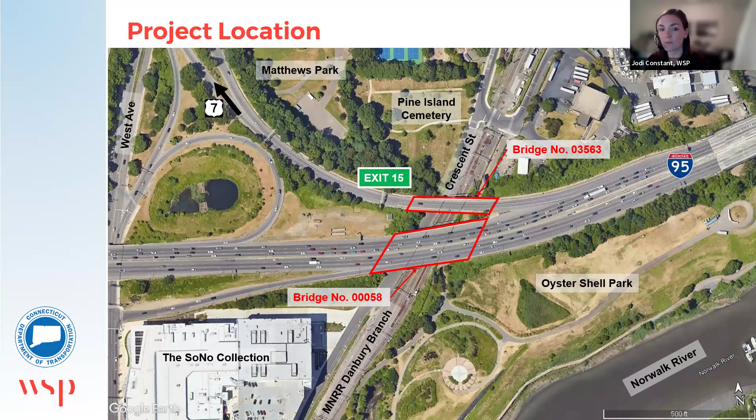The purpose of this project is to maintain a state of good repair for both of these bridges. Structurally, the needs include addressing deck deterioration, bearing, girder, and substructure deterioration. We are going to upgrade each of those structural elements to have a minimum of a satisfactory condition rating. We're also going to improve the aesthetics of this site by removing any graffiti, and in turn, by addressing that deterioration, will also improve the aesthetics.

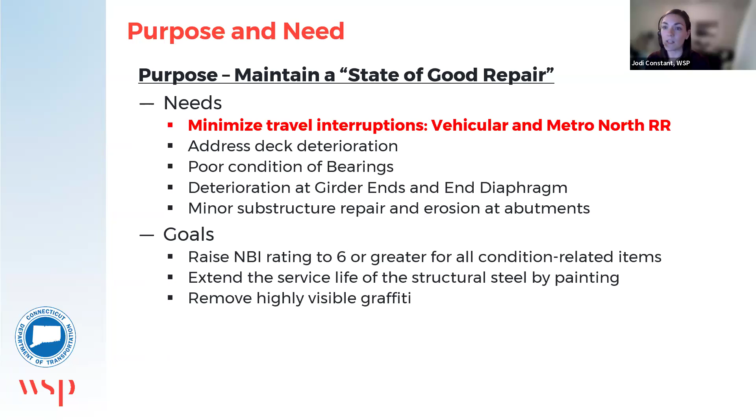Since this is a very heavily traveled area with I-95 being carried, there is an overall goal for the project to minimize any travel interruptions. And that's both vehicular, carried by the bridges, and underneath for Metro North Rail.

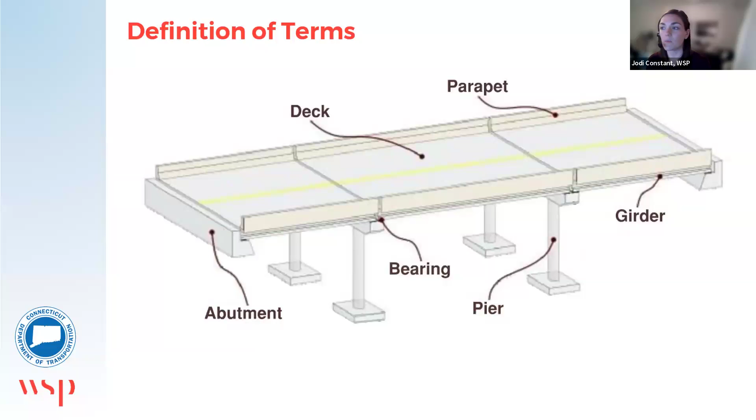Before we review the existing conditions of the bridges, I wanted to go over some terminology that's going to be used in the presentation. Looking at a schematic bridge here, the abutments are the supports on either end of the bridge. The piers are the intermediate supports. The deck is the concrete riding surface, and the deck is supported by steel girders below. The steel girders sit on bearings on both the piers and abutments.

Again, the reasons for this project is to address the structural deterioration of both bridges. There are currently low condition ratings for the deck, girders, and bearings. The photos on the screen here were taken from an inspection that we completed as a part of this preliminary design, which shows the current conditions.

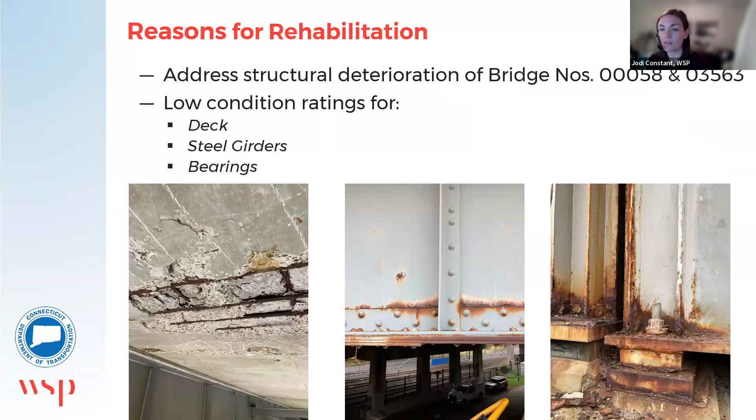When we refer to condition rating, that is a numerical scale that helps us define what the level of deterioration is for each of the bridge elements. So the scale is shown here. As you can see, 9 would be in excellent condition, or otherwise a brand new bridge. Our goal for the project is to upgrade all of the structural elements to have a minimum of a satisfactory condition, or a 6 rating.

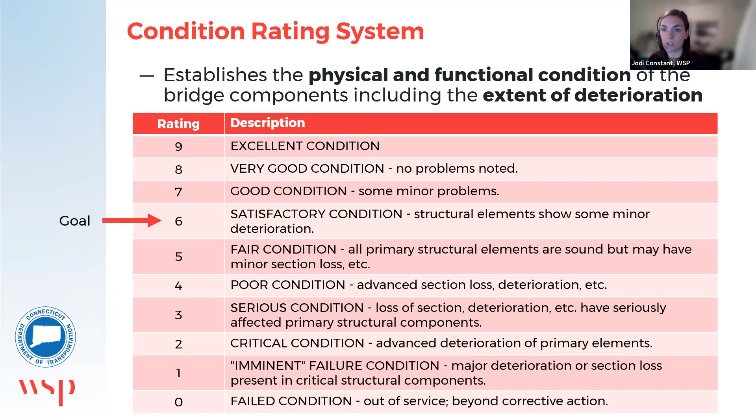This table here shows for each bridge and for each major bridge element, the current ratings. As you can see, there's a number of 5s and even a 4 on the bearings of Bridge 58. Again, all of our project scope is aimed at improving that to a minimum of satisfactory.

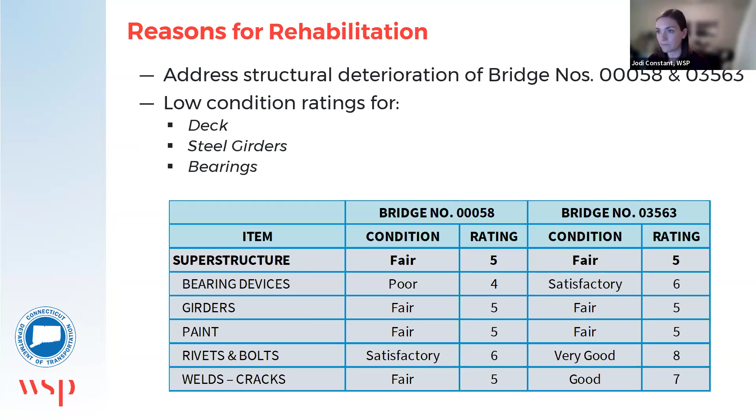This display plan shows the limits of the project scope. The areas shaded in orange are the 2 bridges themselves. This is where a majority of the work is going to be completed for the project. You can also see the shaded yellow areas on either side of the bridge. These are going to be the limits of repaving to really ensure a smooth transition from the existing pavement over the bridges, tying back into existing on the other side.

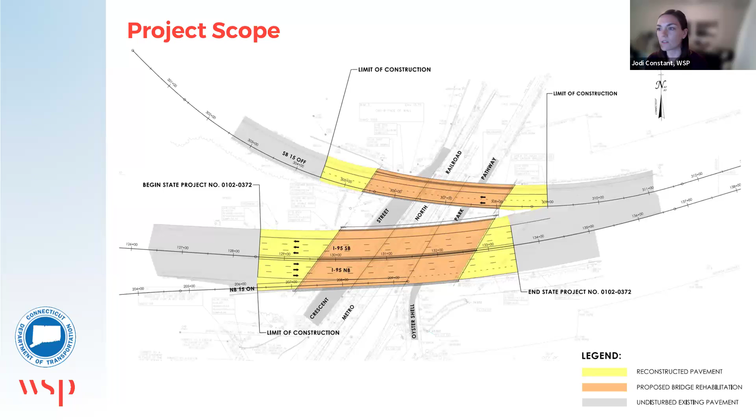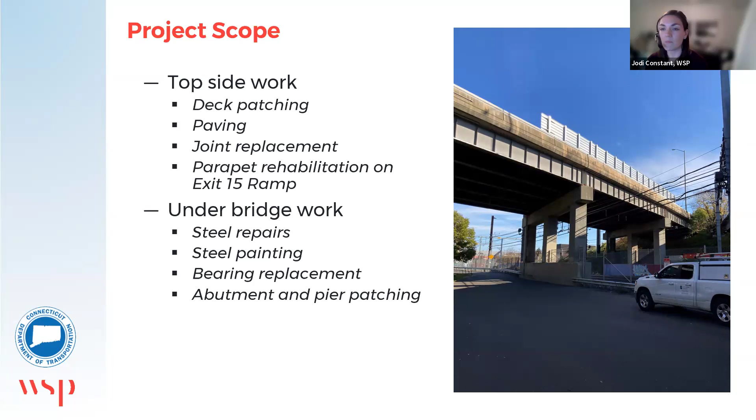For the project scope, on top of the bridges, we're going to be completing deck patching to the concrete deck. We're going to be repaving the bridges. We're going to be replacing joints at each of the piers and abutments. And we're going to be completing some rehabilitation work on one of the parapets on the exit 15 ramp. Underneath the bridge, we'll be completing steel repairs and painting to the existing structural steel. We're going to be completing some bearing replacements at select locations. And finally, we'll be patching the abutments and piers, concrete patching.

Regarding utility impacts for the project, there are overhead utilities that run underneath both bridges. There is a line owned by Frontier that runs along the west side of Crescent Street, only under the ramp structure, and catenary lines along the rail that run underneath both structures. Temporary impacts are anticipated for both utilities. The catenary lines especially will need to be de-energized for any work adjacent to that, and the Frontier line will be temporarily relocated during construction.

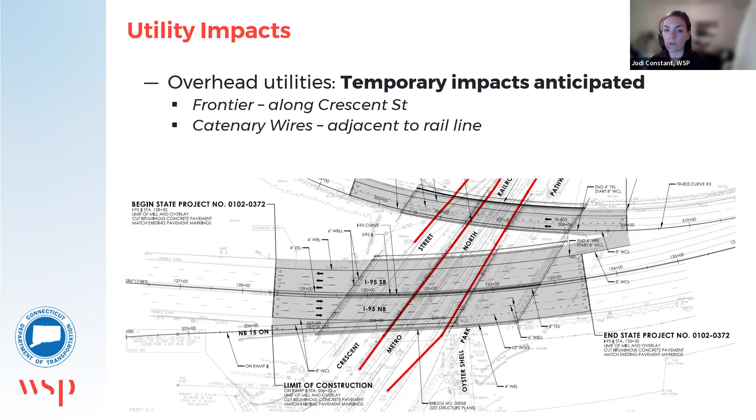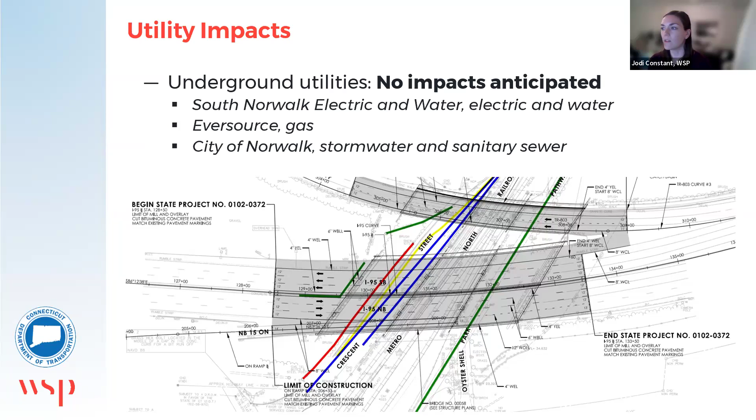For underground utilities, no impacts are anticipated as all of our work is going to be above grade, but we are aware of utilities mostly that run along Crescent Street. There is water, gas, electric, and stormwater drainage present there, and there's also a sanitary sewer under Oyster Shell Park. So these will be monitored, but no impacts are anticipated.

For environmental impacts, there's one permit anticipated for the project, and that is the Coastal Area Management Review.

At this point, I'd like to step through some of the traffic closures and shifts that can be anticipated when the project goes into construction. Starting with Mainline 95 and the exit 15 off-ramp traffic, for these two travelways, the temporary impacts include off-peak lane and shoulder closures. Off-peak refers to when there is not a lot of traffic, so the majority of this work is going to be done at night to minimize impacts.

There is an on-ramp to 95 northbound that is carried by Bridge 58. This is going to require closure temporarily in order to complete the top of deck work in this area. Temporary closures are anticipated to be at night, and traffic here will be detoured. This is a short duration for this work; we're anticipating a total of 5 to 10 nights for this closure, and again it would only be at night. The ramp would be reopened during the daytime.

There is a sidewalk carried by the ramp bridge 3563 on the north side. We do anticipate temporary closures for this sidewalk. Rather than having a detour for pedestrian traffic, a taxi service will be made available to carry pedestrians from one side of the bridge to the other.

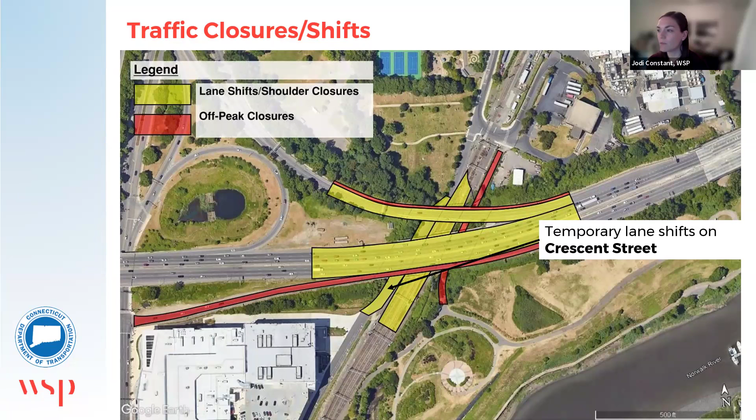Moving below the bridges, for Crescent Street below, there's only temporary lane shifts anticipated here. This is a one-way street that is fairly wide, so we don't anticipate needing any full closures for this roadway.

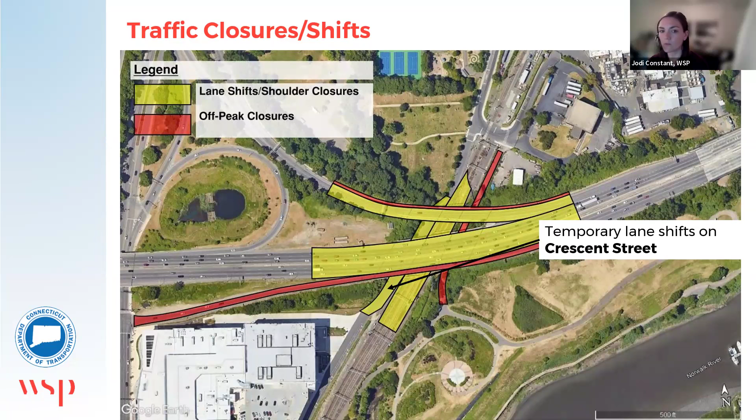For the pedestrian pathway at Oyster Shell Park, we're very aware of the public interest and use of this pathway, so we're going to minimize impacts to the extent possible here. In order to reduce those impacts, we're going to make sure that any repairs performed here occur overnight, so any closures or shifts to the pathway would be at nighttime. We're going to maintain access to the park via Crescent Street and North Water Street. We are going to replace in kind any fencing that may be damaged during construction, and any damages that occur to the pathway or adjacent grass areas will be fully restored at the end of construction.

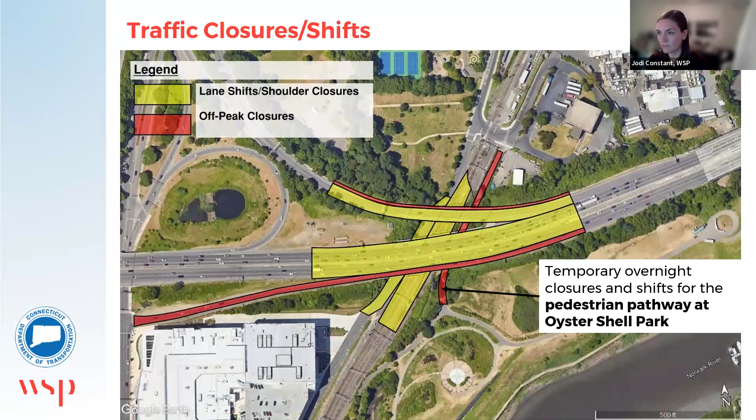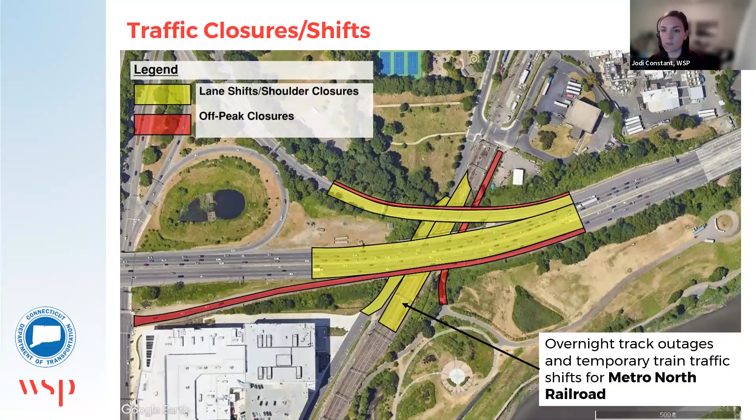Lastly, there will be temporary traffic shifts and outages for the Metro North Railroad traffic. Timing of these shifts will be off-peak and anticipated to be performed at night as well.

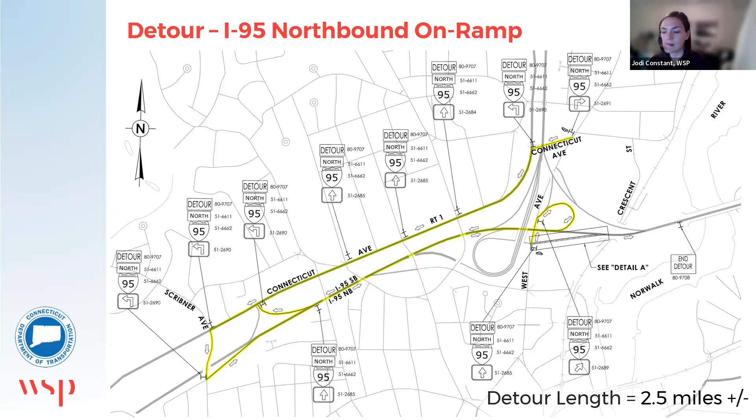For right-of-way impacts, there are no property rights or takes anticipated for the project. We do know that we are going to have continued coordination with the city of Norwalk, especially for the activities in Oyster Shell Park, and continued coordination with Metro North Railroad for any track impacts that we will have.

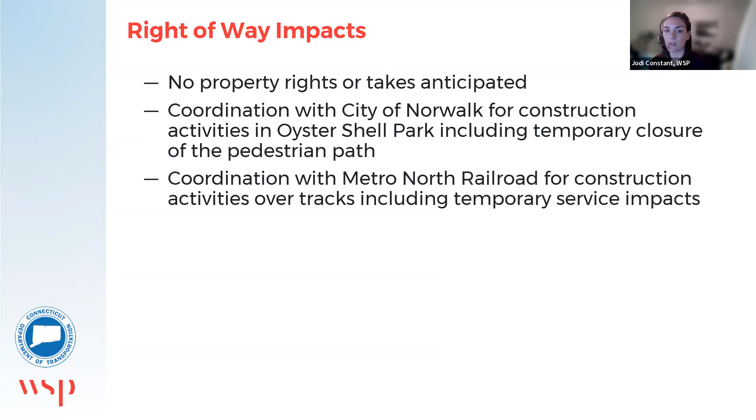The funding for the project is 100% state funded, and the current cost estimate for the project is $15 million.